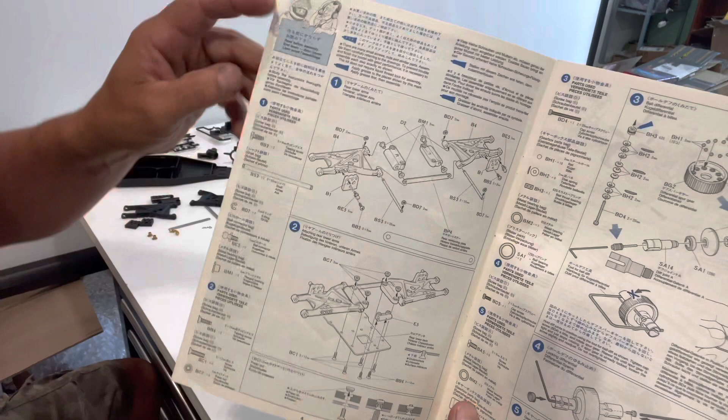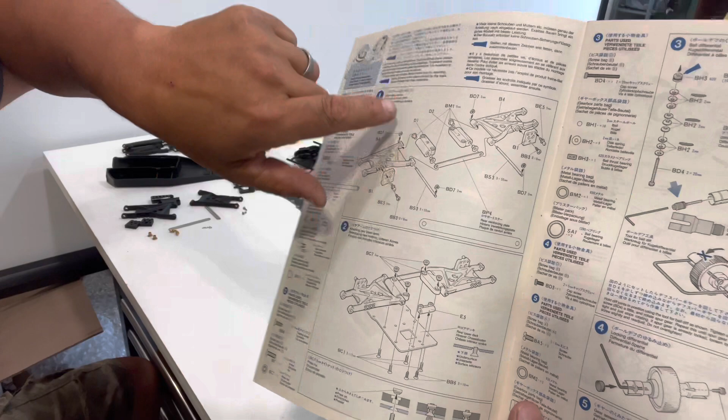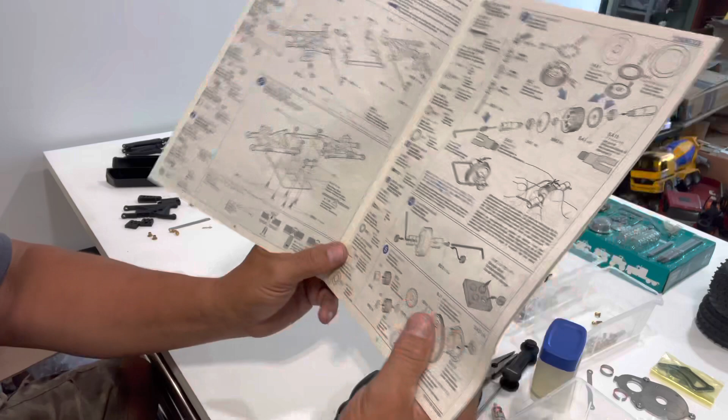So as I get started here on step 1, you can see we're putting the rear arms together with the mounts, and then step 2, it just pins together with C-clips on both sides of these mounts here. Step 2 is going to be actually mounting the arms to the rear deck FRP chassis plate. So I'm going to go ahead and put this together and get it mounted to the rear deck, and then I'll show you that real quick before I start assembling the ball diff.

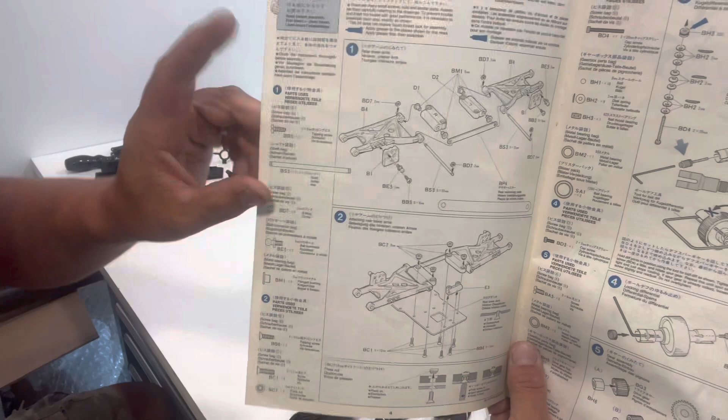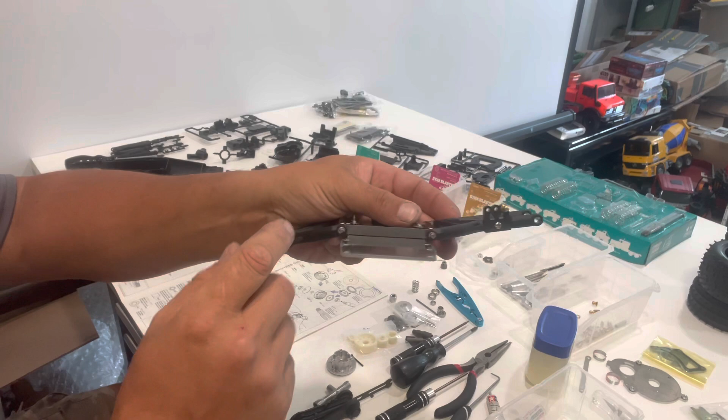Alright, now that I have you back, so steps 1 and 2, like I was showing you before, the rear arm assembly onto the FRP chassis plate, rear plate, all of that is done. So there's just 2 pins with this strengthening bar. Plastic just gets screwed on from underneath. And then there's a couple of mounts here that are, I'm assuming, for shocks or something. We'll find out more later.

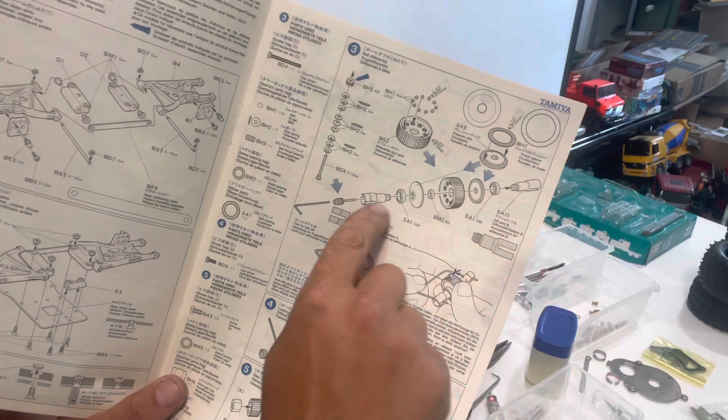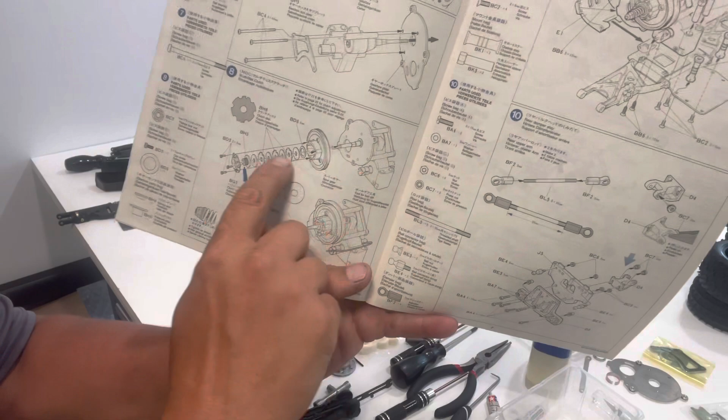And then the next step is assembling the ball diff. So we have to assemble the whole ball diff, and then we have to assemble the gear case. And then we're going to get into actually putting the rear gear case together, and then it's immediately into the slipper clutch. So let me start getting some of this taken care of, and then obviously it's mounting that whole assembly onto that rear deck. So let me get the ball diff made, and I'll get to a certain point here, and I'll bring you back when I have something to show you.

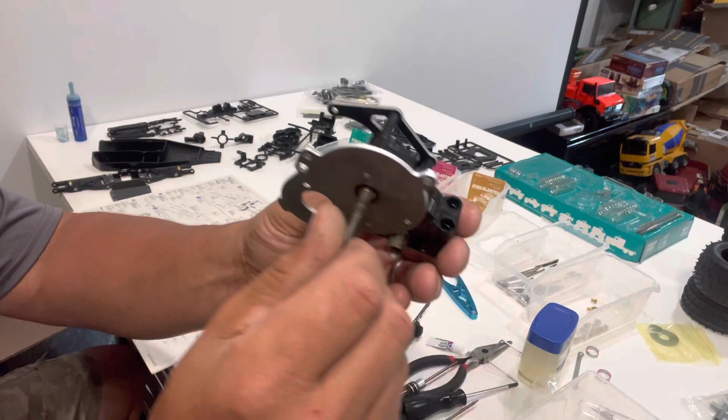Alright, I'm probably going to regret trying to do this on camera. So steps 6 and 7, we're just putting the diff in the gearbox. Thing is butter smooth. And the diff is butter smooth. And then the motor plate and the motor plate brace.

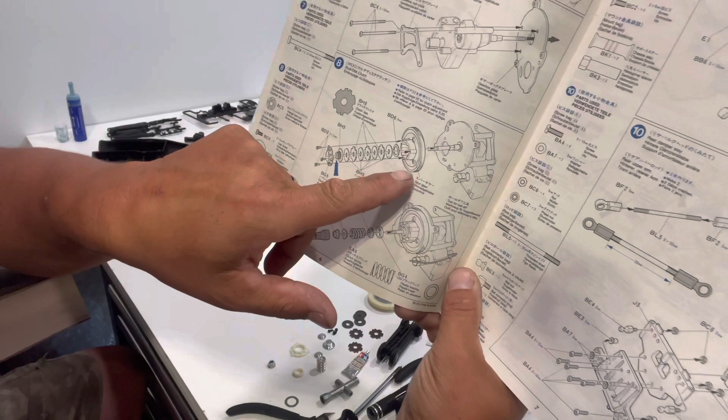So the next step is actually assembling the slipper with the spur and everything else. I'm going to attempt to do this on camera. It's probably a bad idea, but whatever. I've done dumber things. So the spur goes on first. Then there's a washer, which doesn't really make sense because it's huge, but it seems to fit right in there.

Then there's a pressure plate. It's going to be fun to get lined up. Pick tool. Yeah, so there's a pressure plate. Then there's a friction pad. It goes on. And that's going to get lined up. Does it? No, it doesn't. It's just round.

Then there's another pressure plate. There's another friction pad. And there's another pressure plate. And there's another friction pad. And then there's another pressure plate. So 3 friction pads sandwiched between 4 pressure plates.

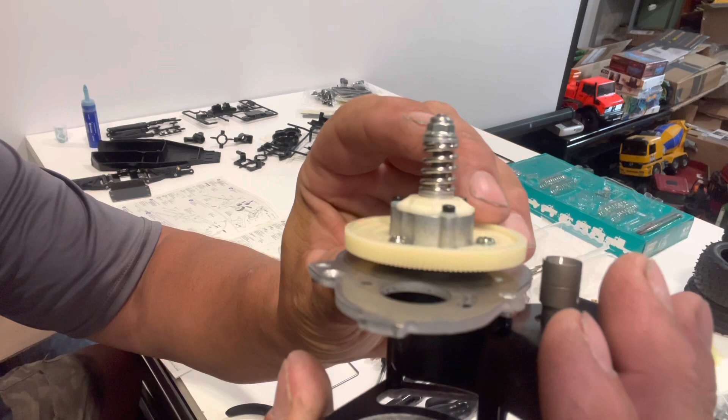So that's about as far as it's showing. If you look, you can see just barely the tip of the screw sticking out of that nut. See just the tip sticking up? If you look in the book, right here, it shows you just the tip sticking up. So it's as tight as shown. So that's what I did.

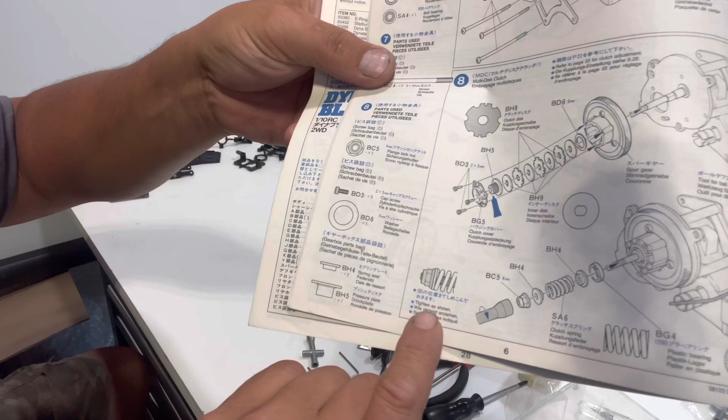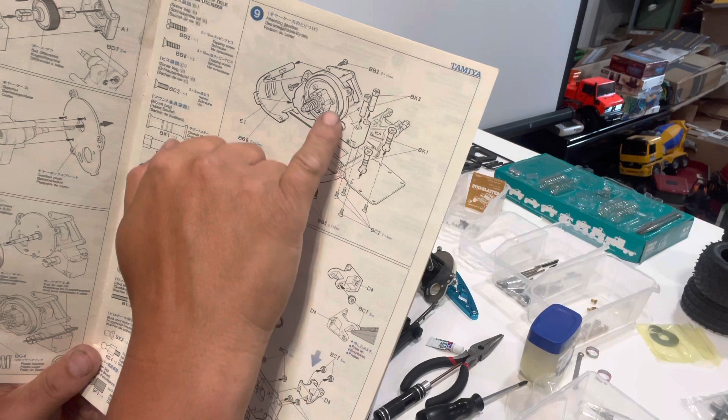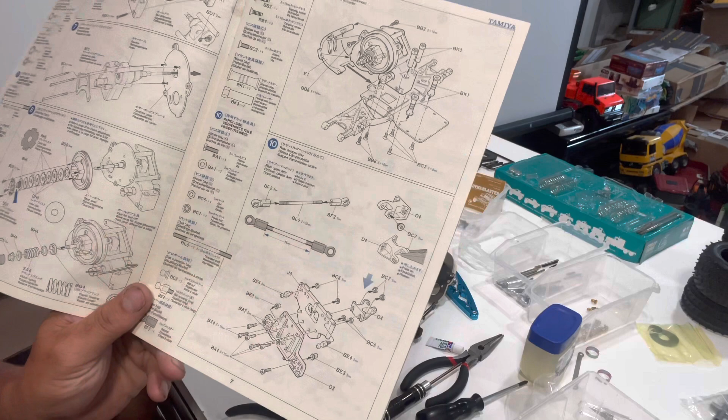So at this point, the rear gearbox is 100% done. Feels awesome. Next step, step 9, is actually mounting it to that rear plate with the rear arms we built before. Then it looks like we're going to start building the rear damper stay and top arms. Let me get this mounted up and start getting some of this pre-assembled, and then I'll bring you back so you can see it. And then it's mounting that to the chassis. So basically we're wrapping up the rear end right now in the next few steps.

And we are going to get a motor mounted in this because I do want to run it. I've got an old Stadium Thunder body that I might put on it, and then we'll probably just tape the bottom of the chassis. But I do want to get some of these run.

I've gotten a lot in the comments - are you going to run these cars? So the intention of these cars is my collection, first and foremost. With that being said, I get it, I totally understand - you watch these cars being built and restored, and you want to see them run. So certain cars I'll do my best to run and protect, and I'm going to hope for the best. I'm not going to beat the living piss out of them. I'll be honest, it's not what I'm about.

But I'll take it to a ball field or something, and I'll show you what it's meant for. I've got new tires - they came with the kit - and I've got another set of new tires spare. So, yeah, we can run it. We'll figure something out, and we'll get it run, and we'll try to protect it the best we can. It'll have a Stadium Thunder body on it, but at least you'll see that chassis run.

So yeah, let's keep moving forward here, and like I said, I'll bring you back when I have something to show you. But we're probably going to put a pink Acto Power motor in here. I've got a couple spare. So if we're going to run it, let's throw the pink one in - that's what it was meant for. So let me get it finished up here, or get something to show you, and I'll bring you right back.

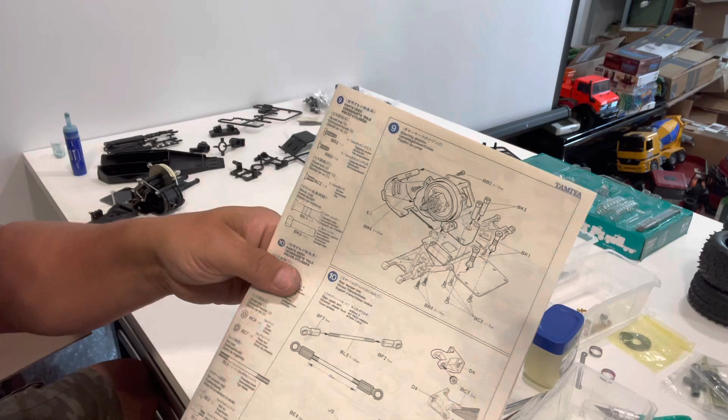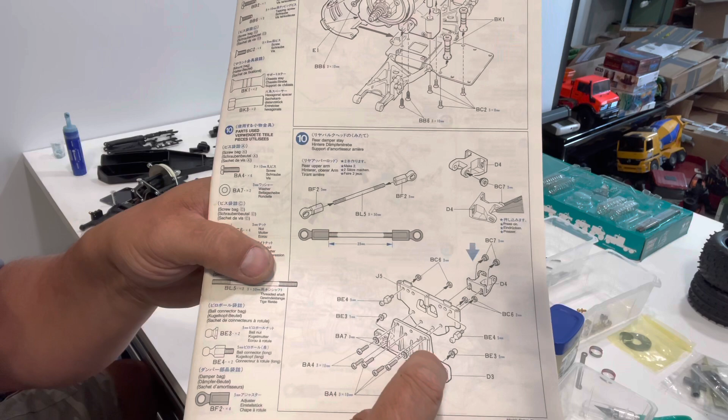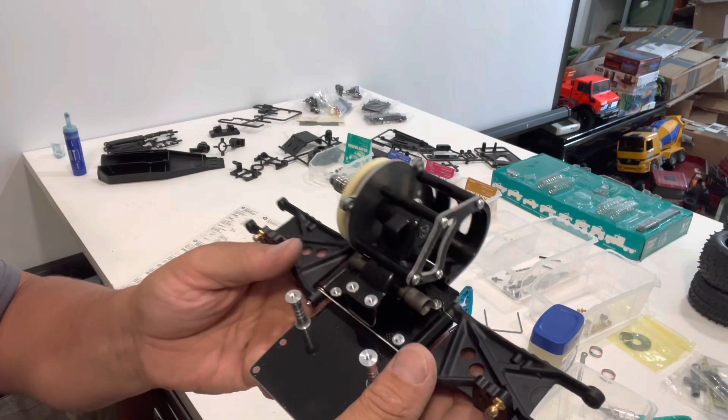All right, made some headway here. So when I last left you, we had just finished the slipper clutch. Step 9 is mounting that whole rear gearbox assembly to the main plate, along with some top deck supports, and then the rear motor guard. Step 10 is getting the rear damper stay assembled - it's a 2-piece, and then the upper arms, rear upper arms. So here it is, mounted to the FRP rear chassis plate.

There's your motor guard in the back, right? So the motor will go in there. So that was step 9, and then step 10 was assembling the rear damper stay, a couple arms. So moving on to step 11,

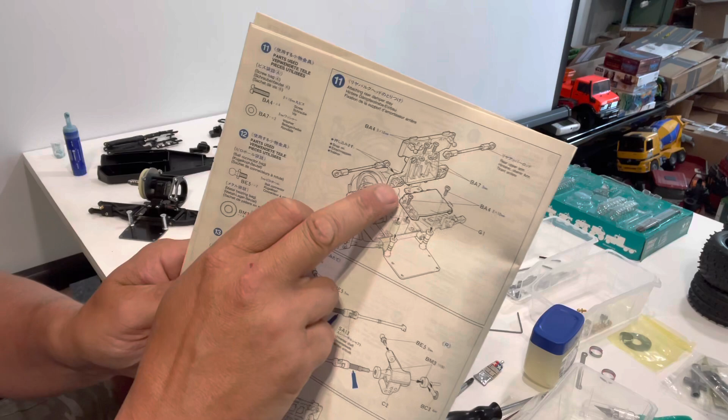we're going to mount the damper stay and the arms to the actual chassis. And then step 12 will be getting the rear uprights assembled with these beautiful UJs that are actually still in the blister pack. So we'll get those cut out. We'll get through 11 and 12, and probably 13 as well, just because it brings the rear end together.

And then step 14 will be mounting the motor. So I'll have to dig out one of my pink motors, and then it's just the MDC gearbox cover - multi-disc control, hence the 3 friction plates and 4 pressure plates, multi-disc. Now you know what MDC stands for. So yeah, let's get that wrapped up, and then we'll show you that, and then it'll start on the front end.

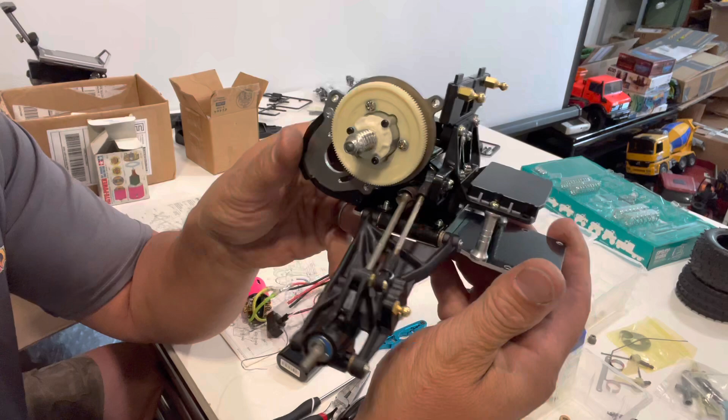Alright, so in steps 11, 12, and 13, like I said, it was mounting the rear damper stay to the assembly, and then making up the axles, the UJs, with the rear uprights. So all of that's assembled. Absolutely beautiful.

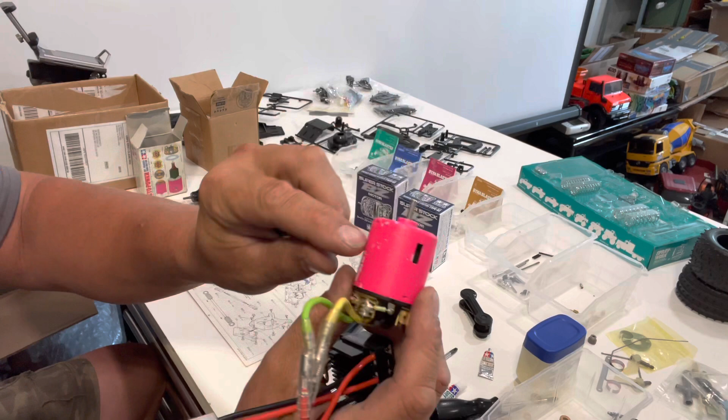We're up to step 14 now, where we need to mount the motor. Most of my vintage motors, if you've seen my collection videos, are behind glass, but I had a box of leftovers that I didn't put behind glass. I've got a bunch of new BZ motors that are brand new in the box, but I knew I had a pink one in here. This one's a little more beat up, the other one's in the glass, brand new, so I broke it out. The motor itself has some dinging on it, obviously used. I didn't realize it had an extra rotor in that box, so that's cool.

This is the box of extra motors. I forgot these were even in here. There's an almost mint Technigold sitting in here, a beat up Technigold, a Dynarun, a Dynatech. I actually have a new unboxed one on its way, it was the last one I was missing. And there's a lightly tuned one sitting in here.

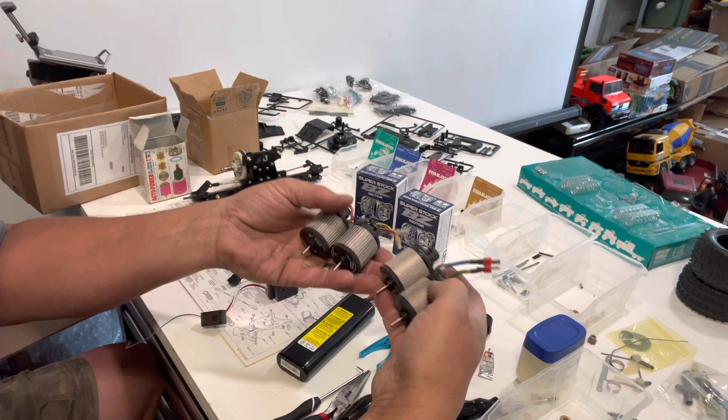And then, look at this. Look at this. So in my egress video, I gave away a Dynatech O2H. And I've got a brand new one in box in the cabinet, and I've got one out of the box on a motor stand. Dynatech O2Hs - I must have went on a kick at one point when I first started collecting.

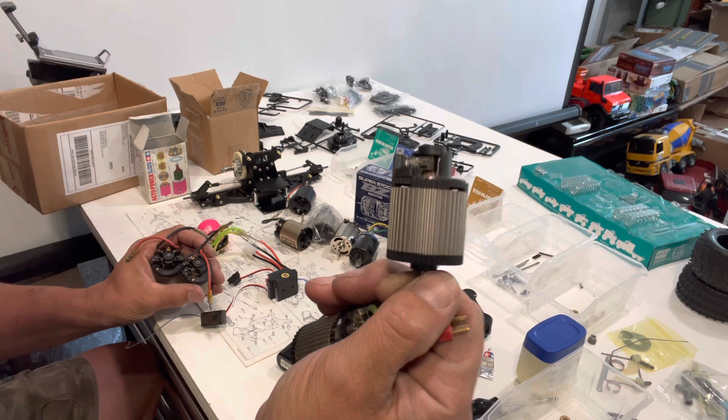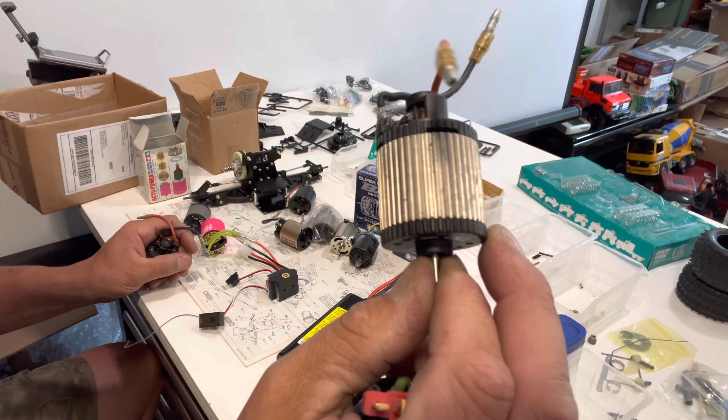That one right there is absolutely brand new, brand spanking new, not a mark of rust or anything on that one. Some of these are in really good shape - that one's in really good shape. This one's got a little bit of marks deep down inside, but it's absolutely mint too. This one's got a little rust on it here and there. But yeah, just some RC goodness.

And then this one, I think I bought this whole box of Parma motors, it was $25. So there's a Yokomo modified, a B&R Bullet - that's an old motor. Here's a K modified Parma, there's a B&R Motorworks, and another B&R Sportsman.

So just a bunch of old vintage motors. I love looking at this stuff. Sometimes I forget what I've got in my closet - it's just a ton of stuff in there.

So we're going to use this pink Acto Power. I got it hooked up here to - this is just a 2S battery. My new Noble Pro actually holds a phone, so if you want to film, which obviously I plan on doing. So let's see, let's turn this on.

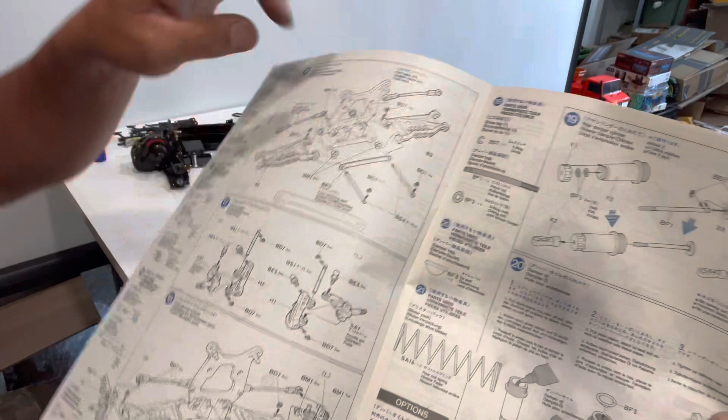We're on step 15. We're going to start putting together the front shock tower and the front upper arms, and then front lower arms and suspension pins. So let me get some of this assembled, then it's the steering knuckles, and then it all gets put together. Let me get some of this assembled and I'll bring you right back. I know the video's getting long, so I'll try to push through here.

Alright, so that gets us through step 18. So that's the front end, basically put together, ready to be mounted on the chassis. It's got all the shock mounts on it already. There's another suspension brace just like on the back.

So I'll show you what I did real quick. I know the video's starting to get a little bit long, so yeah, I assembled the front shock tower first here, and then I made the two upper arms, and then it has you mount the lower arms onto the shock tower.

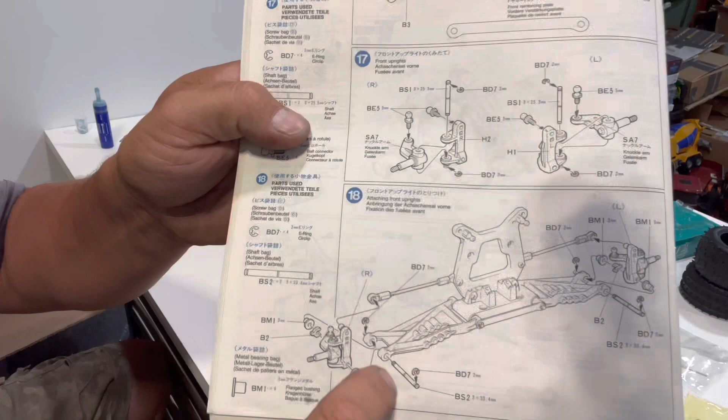It's just E-clips, standard stuff. Then it had me make the front hubs, so a two-piece hub just like normal. And then it had you pin the hubs onto the lower arms and connect the upper arms.

So the next step is making the CVA shocks, which I'll do off camera because that's no big deal, and if you've seen one, you've seen a hundred. Then you actually get the shocks mounted front and rear, and then we're finally going to get everything bolted up to the main chassis deck.

So the very last step is essentially bolting everything to the chassis. I mean, we're on whatever it is here, step 20 or so. We're on step 19 and we haven't touched the chassis yet. So we're getting there. Let me get the shocks built and I'll get them put on - looks like we do the rear first and then the front, and then I'll bring you back just before we start mounting everything to the chassis.

Once the shocks are built and they're on the front and rear bulkheads, all that's left is mounting them to the chassis and then putting on the bumper and steering arms. Other than that, it's body pins and electronics, and we already have the motor in, and the electronics are already set up. The receiver's already bound too, so that's going to be pretty simple. So let me get the shocks built and on, and I'll bring you right back.

Alright, so the shocks are built. Feel great. That's the rear, that's the front. Pretty simple - the front's got a spacer and two O-rings on the inside, and then the rear has a bunch of spacing sleeves for the springs. The front's got two small ones, and the rear has two big ones and then a narrow one.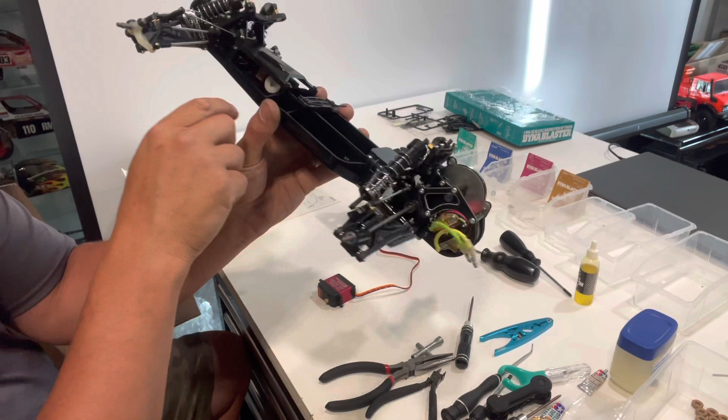So I put the anti-roll bar in, powered it up again, trying to see up in here to figure out why it's binding. I finally figured it out: the distance from the top of the servo mount to where the actual horn is—see how this servo's got a really big top hat or top cap?—it was throwing the arm so far over that it was binding right on the edge of the grooved section. So I took the whole thing back apart, ripped that servo out, and put a low profile servo in there. That did give me more room in the back, but that wasn't what I needed.

The top of that servo is shallower, and it brought that whole mechanism back into the center of this raised area instead of it being on the outside edge and binding. So I finally got that all put back, and putting this together is a pain.

This roll bar, the way that it goes in, these two mounts hold the roll bar. It's all up and under. There you go, Keith. All up and underneath the rear, the upper shock tower, but that's laid back.

So I'll be honest, I got the body mounts in, I got the anti-roll bars on, everything is finally working the way it's supposed to.

What's left on the chassis, I gotta get my ESC and my receiver mounted in here, and then I need to put the wheels and tires on. That's really all that's left, but I'm calling it for this video.